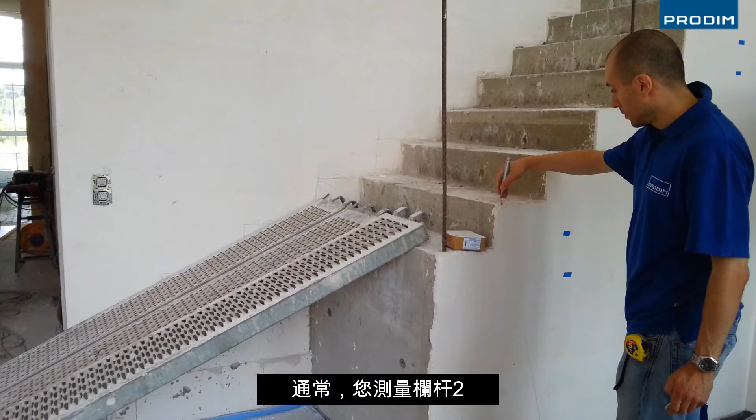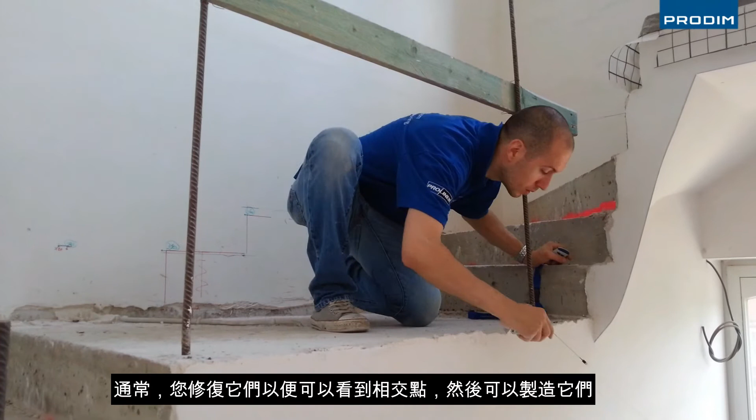Balustrades. Usually you spend a lot of time measuring them so that you can find these fixture points, or you really have to do wooden templates. You fix them so that you see the intersection points between them, and then you can fabricate them.

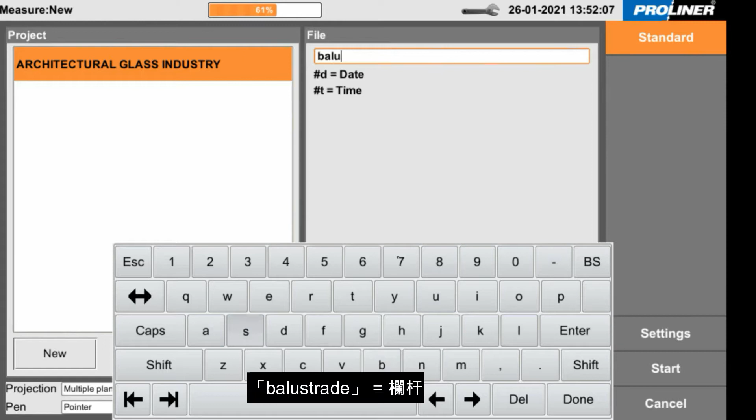In this case, you go with the Proliner, you put it on the tripod, same story, no need to level or to calibrate. Measure, balustrade, and start.

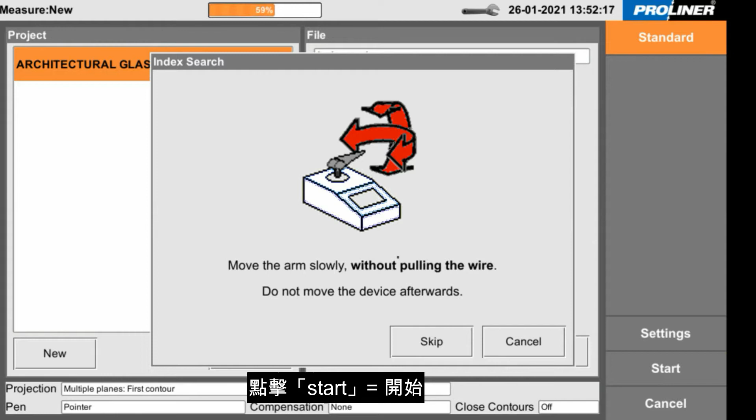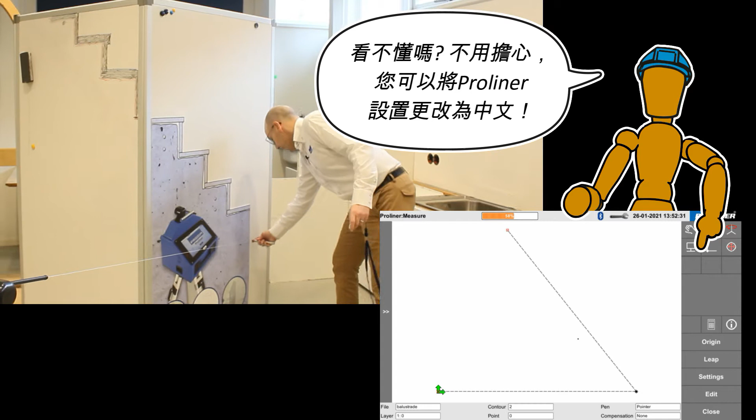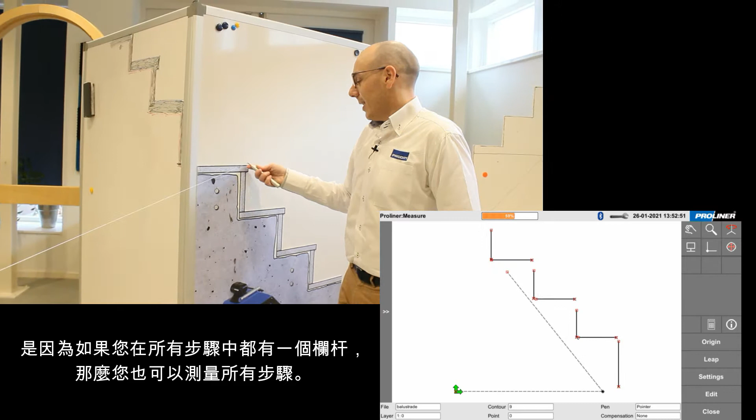And there we go, 3 points on the wall. You start measuring the lines of your stairs, if they are relevant or not. I'm just showing this so you see that it's also possible, if you have a balustrade that goes around all the steps, you can measure, but normally you just want the first and the last step, and you already have the angle, and that's it.

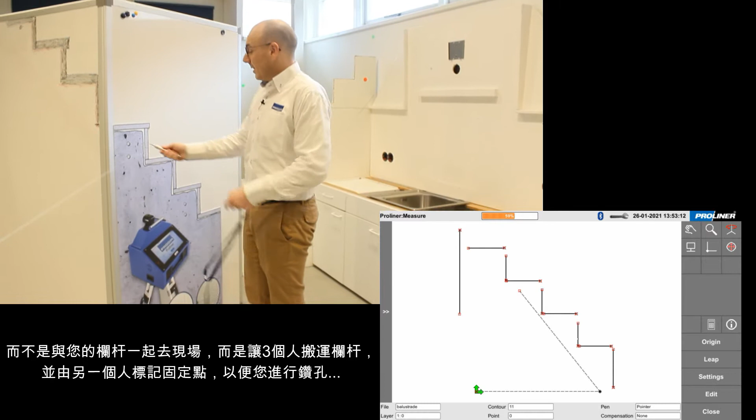Fixture points, you can already define them. Instead of arriving on site with your balustrade and having 3 people holding it and another marking, so that then you can drill it, here you just mark them before. So you save also in the number of people you send on site for installation.

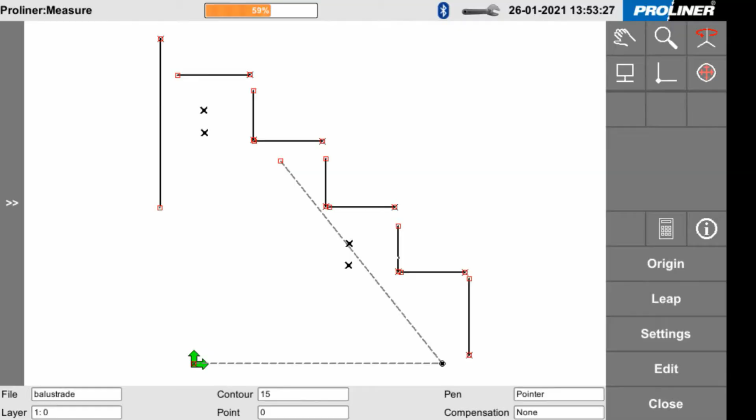So as you can see on your screen, the drawing is already done with all the information that I need. I'm going to show you how easy this can be edited as well, but in this case I have another piece of stair on this side. It still doesn't have any fixture points, so let's mark it like you do when you go on site, and then let's measure it. So I have here a pen.

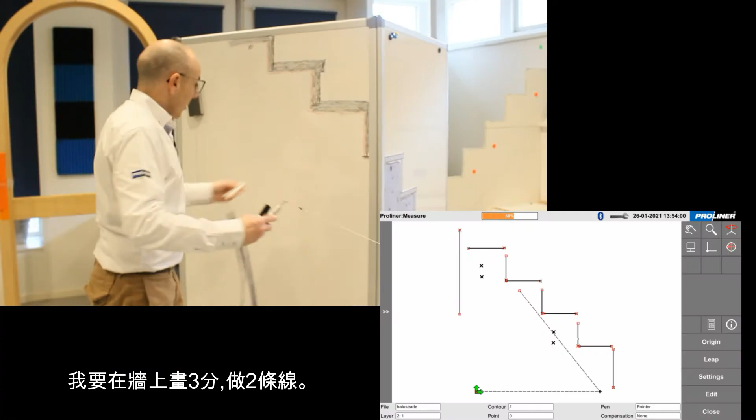What I'm going to do is another plane, like in the shower, if you remember well. So 3 points on the wall, and then I'm going to measure the lines. Because it's mechanical, it's always accurate.

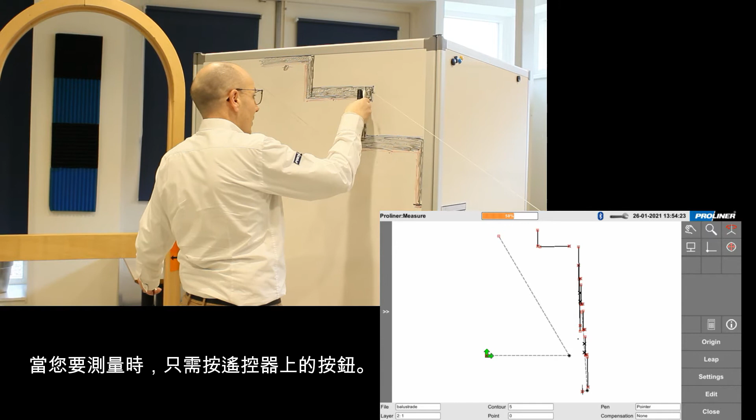When you are at the point that you want to measure, you simply push the button on the remote. It's really not important the shape. If you have a curved shape, you can also measure curves.

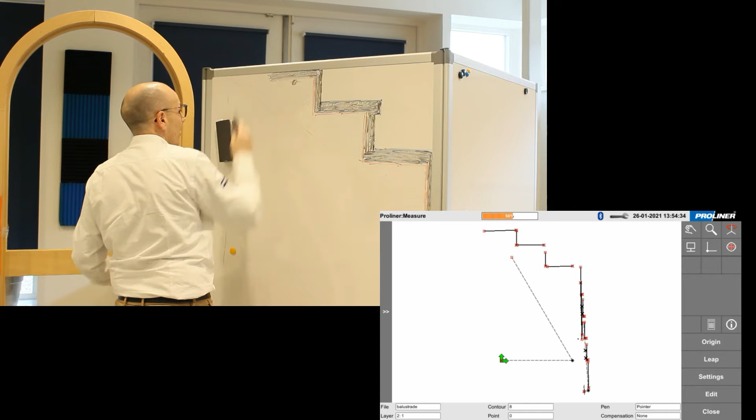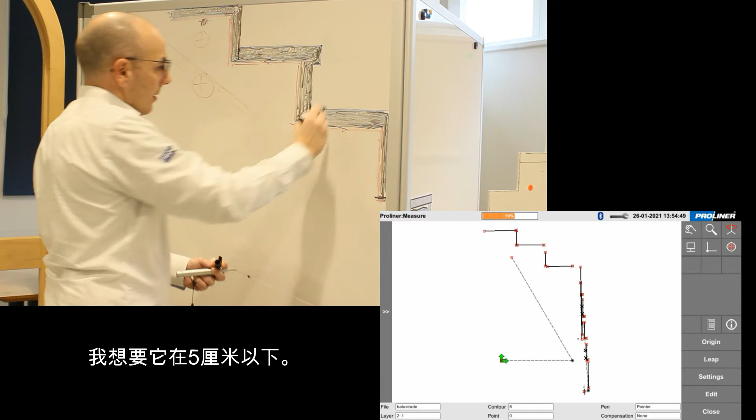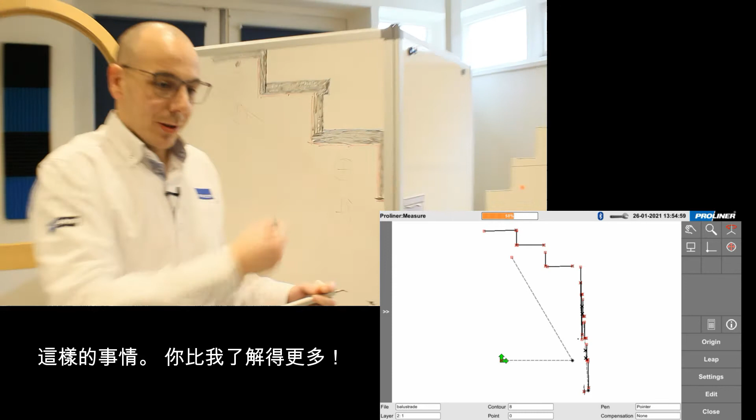So let's say that I want the first fixture point, usually in the half around here, and then below something like 5 centimeters. Something like that. You understand, this is your work, you get it better than me.

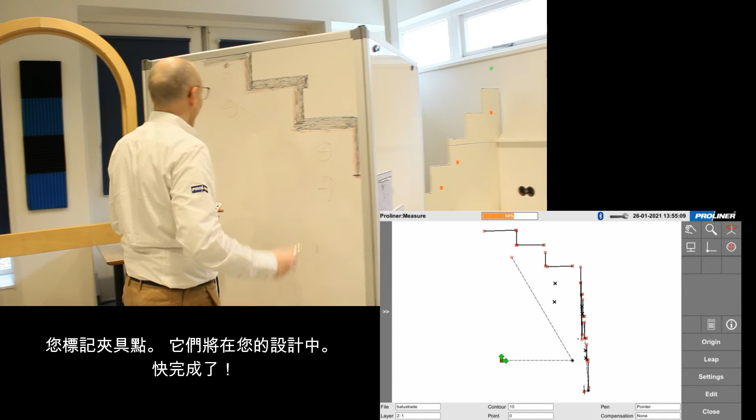Fixture points, you mark them, and they will be in your design. Mark them. Done.

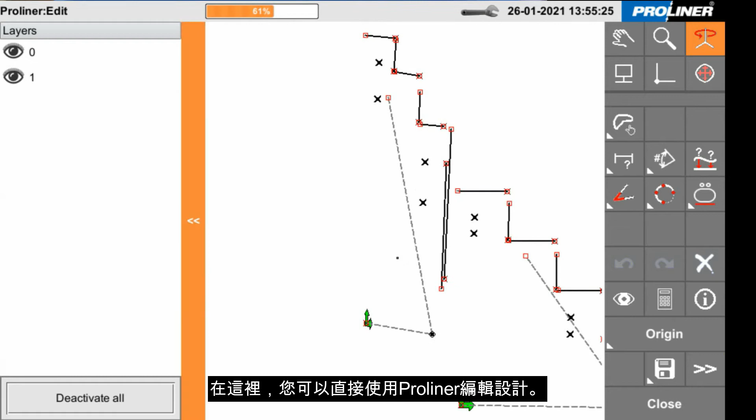So here now you have, just like before, the possibility to edit your drawing directly on the Proliner. So you're selecting to work only with this one. Again, 3 points gone. Connecting lines, just to have it a little bit bigger.

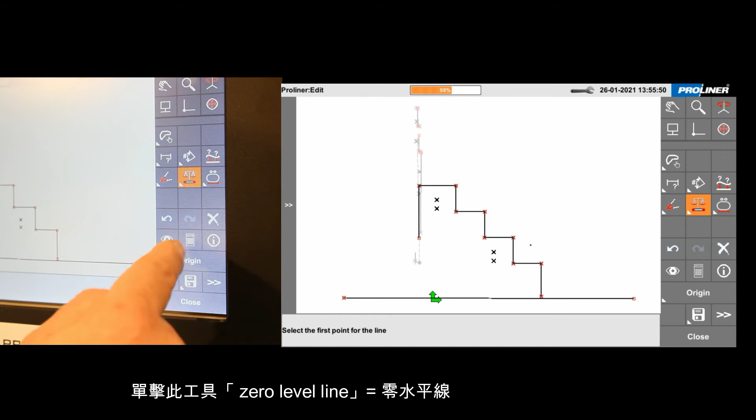Zero level line. Now let's place it below. On level, 1 meter above. 1000.

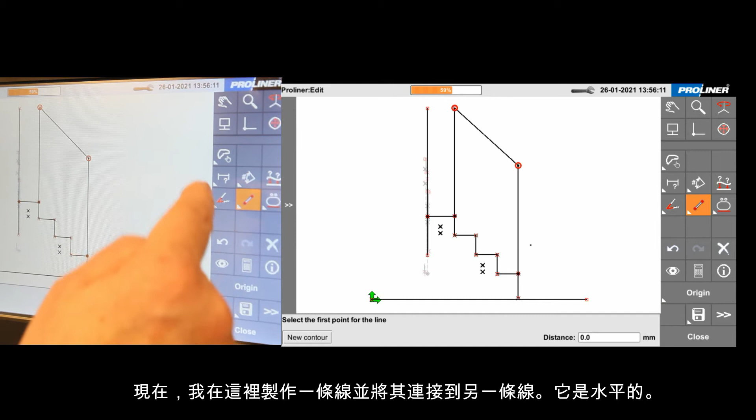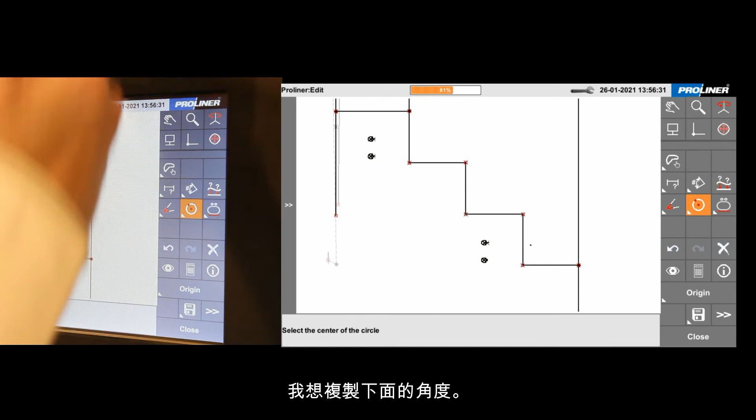And now I take this line to here, and this one I connect to this one. And here I have the fixture points, which are, for example, 9mm radius. Angle, I want to copy this angle below, for example. If you have a different angle below, you can also measure it. What you want to do, usually, is give 300, and then you have your template.

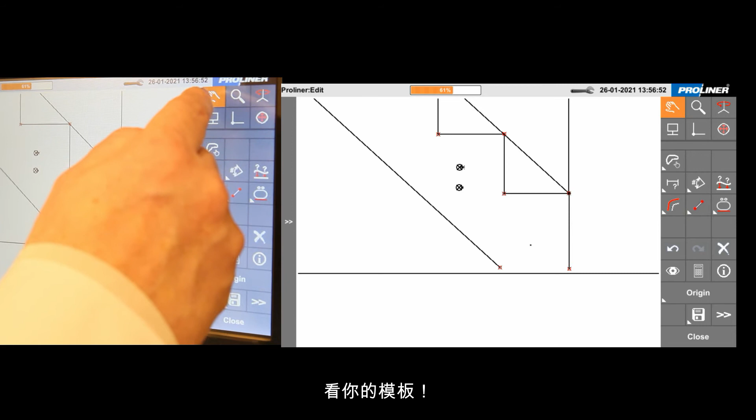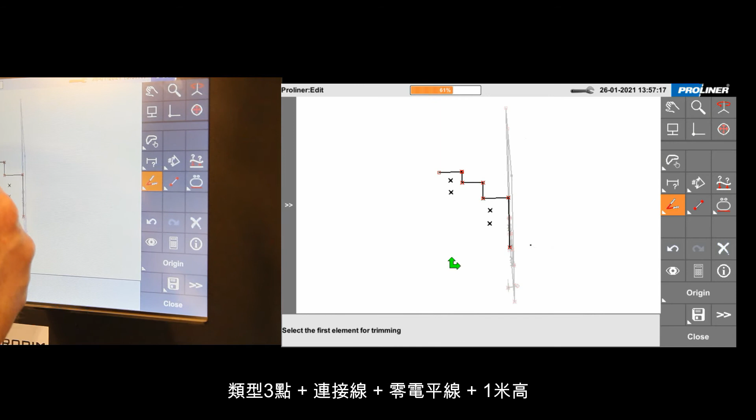Same story, first 3 points gone. Connecting lines. And now, zero level line. Origin over there. 1 meter above.

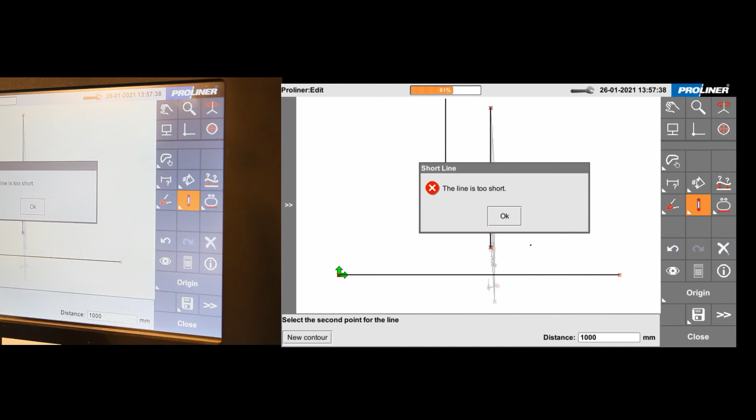And in this case now, let's say that I'm going to make it like this, right? Because that's usually what you want. The same angle, pushing it below, the same 300.

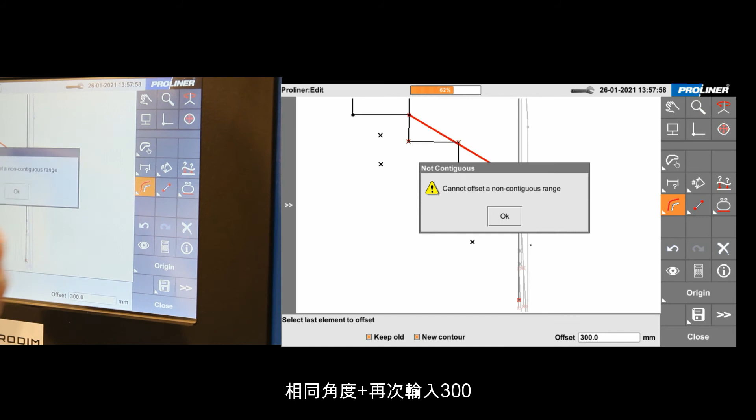You see that here the fixture points that I defined, the 300 wouldn't be enough, but let's make it a little bit more, 200 more, for example.

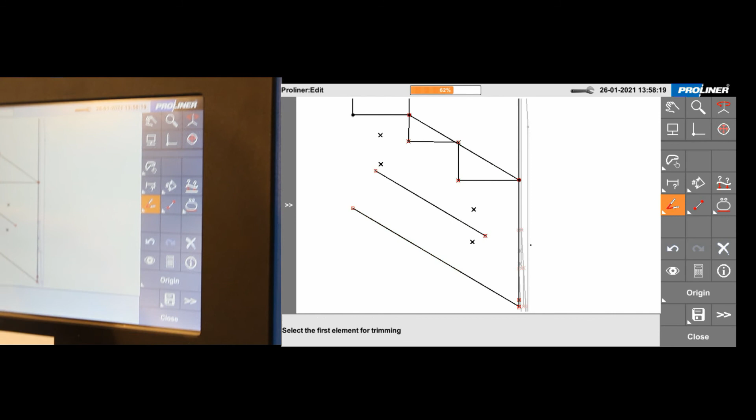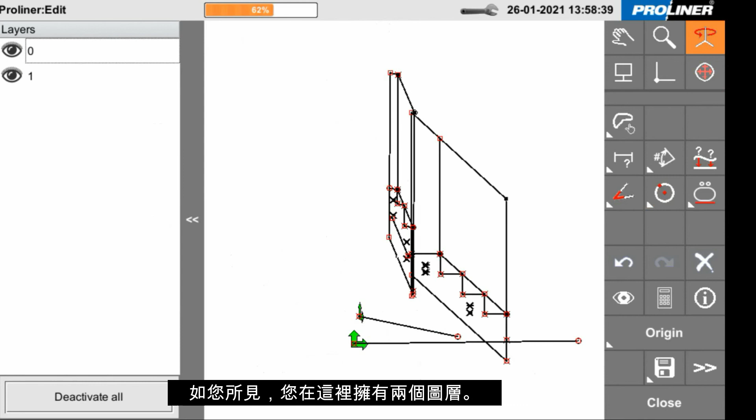So now, as you can see, you have both your layers. Of course, in this case they intersect because one is over the other, and you have to offset. Usually you can do this here on the ProLiner itself. You can offset one from the other, or you can use your CAD software. I do advise the Draw Advanced for it. It's really wonderful, very simple to use, and it allows you to see the thickness of the glass you are about to install, and much more.